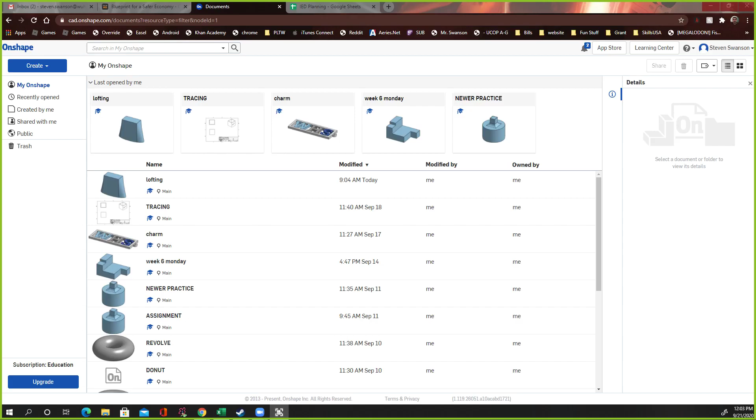So today we're going to do something called lofting. I'm going to create a new document and we'll call it lofting practice.

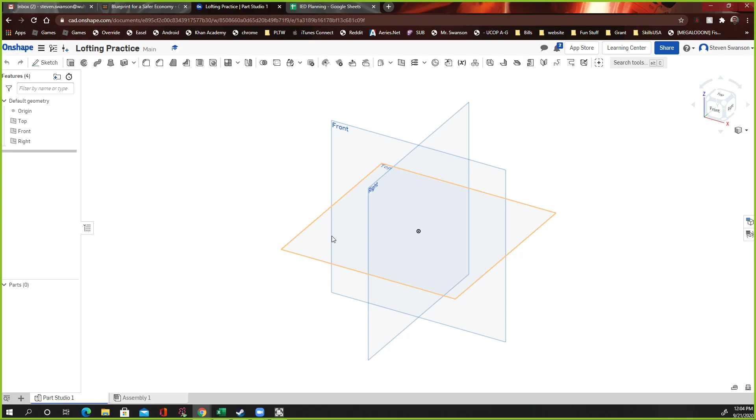So here we go. First off, we're going to do a sketch on this plane here. This is the top plane, so I'm going to click it. And then let's rotate that around. Normally on normal softwares it does that automatically, I don't know if there's a setting on this one.

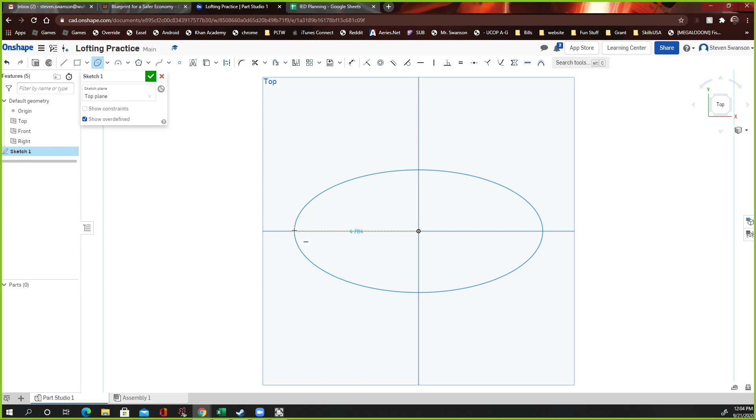Let's start with a shape. You can go with any shape you want. I'm going to go with an ellipse, just something a little bit complex. I'm going to click here, and then click this dimension tool and say this thing should be, let's say, 4 inches across.

And I'm going to click this wall and that wall and say it should be about... oops, I clicked the wrong thing. There we go, I'll say it should be 1.5 inches. So what I'm going to do is create this like an adapter for a vacuum nozzle.

So you have a vacuum and you want to create this wide nozzle like this, this thing's going to suck stuff up right here. Or this could be the top of a vase or whatever, it doesn't really matter.

Okay, so I'm done, so I'm going to check this. So we have our one shape and it turned black, which means it's kind of locked up. We pretty much decided every size possible in position.

So there it is. Now I need a new plane. Pay attention to this part. Here's where we need a new plane to draw on. It's got to be kind of, I guess, parallel to this one right here. So watch what we do.

There should be something called plane tool right here. So there it is, see plane? So click that, and then we're just going to do a simple offset plane. I'm going to click this plane, and you see how it raises a new one up right here?

How far away? Let's make this 5 inches tall. Okay, so we'll go 5 inches tall and go. There it is. So there's that new plane it did. See, it's called plane 1.

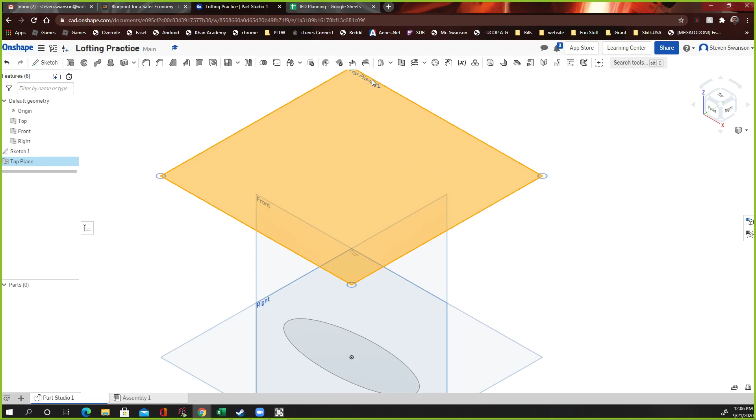And you could name it. You could right click on this and rename it and say top plane, so now it's called top plane. And I could even rename this one, I think... no, I cannot. So that's kind of dumb because I have top and top plane, but anyway, it's fine.

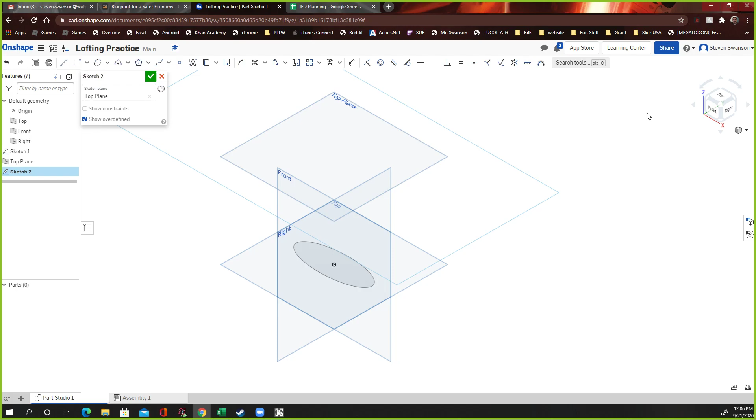You guys get the point. So let me escape out of here. Alright, so we're going to draw on this one right here now. Okay, so let's go to sketch and draw on that new one I just made. Let's click top plane so I can look at it.

And now I'm not drawing on this ellipse. Remember, this is like 4 inches above, or 5 inches above, whatever I said. So let's go with a more different shape, something completely different than this one.

Okay, so I'm just going to draw a rectangle and pretend this is the connector that connects to my vacuum. This could be a circle as well, so we could do a circle or a square. So I'm going to do a square right now.

Or rectangle, I should say. And let's dimension it up, it's always good practice. Let's go 2 inches here. And then let's go not the angle... come on now. Let's go 1 inch right there.

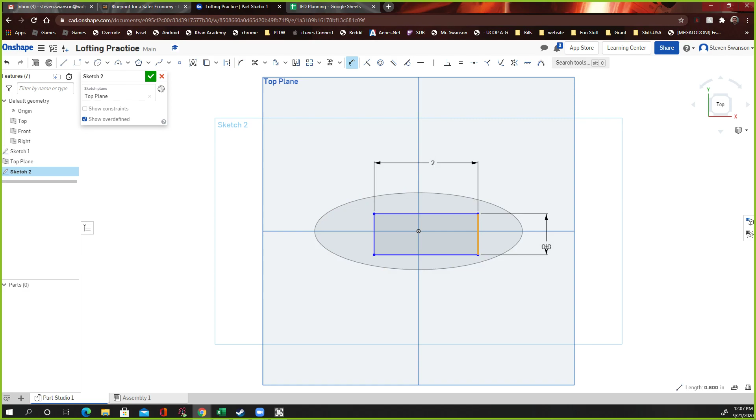And to make this centered, I'm going to say that distance right there should be 0.5 inches. And this right here, from the center to this line, should be 1 inch. That should be 1 inch to make it centered. This has to be 1 inch because remember, this whole thing is 2.

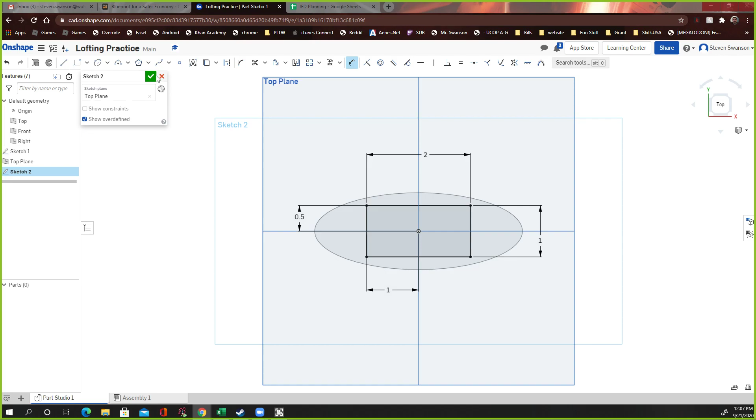So I just divide it in half and now it's locked up. Notice it turned black, so we're all good to go. So now I'm done, let's click that little check mark to say we're done. And let's go isometric view.

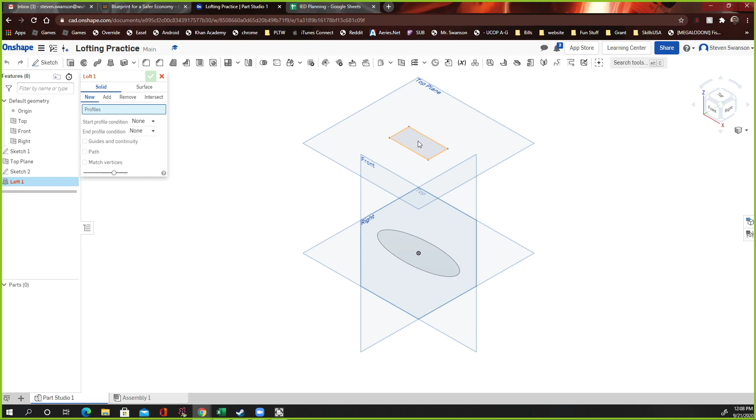Look at that. You see how I have a shape up here and a shape here? We're going to connect this one to this one and it's going to fill in the geometry itself. See this tool right here? Loft, you see it's called Loft right here. Let's click it, and it says profiles. So click this one and click that one. Whoa, look at that.

And it connected it. So let's say it was a special little attachment I wanted to make, it works. Now there's a couple things you could do.

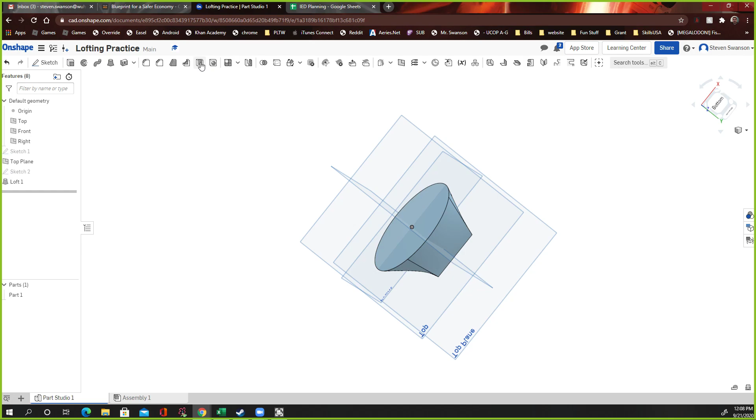We're going to teach you two more things here. We can do something called shell. Do you guys see shell right here? You click that, then we click the face, and then it removes everything, leaving only this amount of plastic left, or whatever material you're talking about. So I'll explain this in a minute. Right now, let's just keep it 0.1 inches, and push check mark.

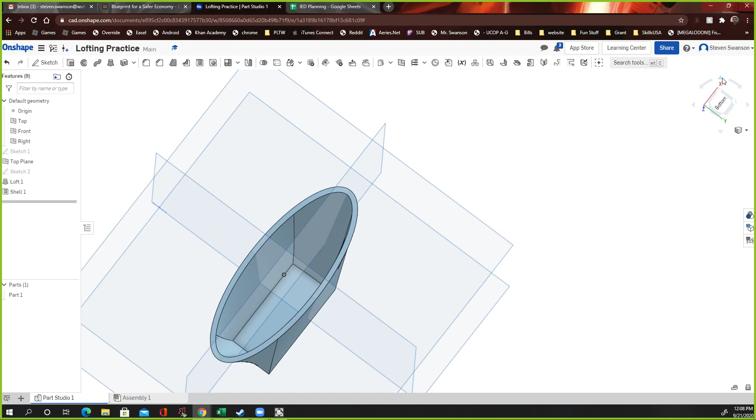So what did it do? You guys want to see? It made like a hole. What it does is, when I click this face, it literally eats away everything like a bunch of termites eating all the way down, leaving only whatever you put, 0.1 inches left, all the way down. So this would be like a vase, I guess. Like if you wanted to put this up, you can fill this with something, like flowers or something.

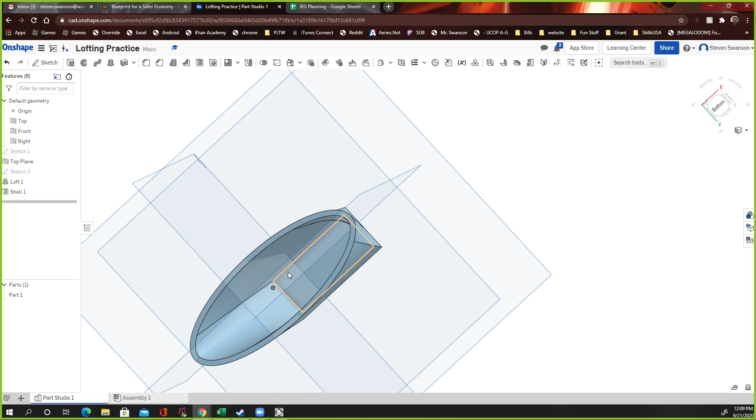But if I wanted a hole, here's how I do this. I have students that messed up before. Watch this. They're like, man, I shelled it, but it didn't do what I wanted. Well, you see right here, I shelled, I lofted, I drew a plane, and I did a sketch, and I did a new plane, I did original sketch, right? It records everything, so I can delete that shell off. I didn't mean to do that.

I let her in already, so she should be in there now. Next. But thank you for letting me know.

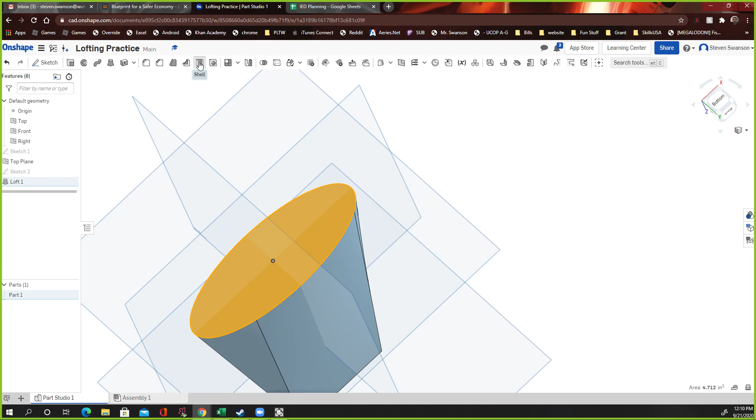Shell. There we go, shell. And let's click hollow and see what happens. Oh, that doesn't work. Oh, I know what hollow does, it makes all the inside hollow, so it doesn't remove the face I clicked on. So if I let go of that, then it does eat that face away as well.

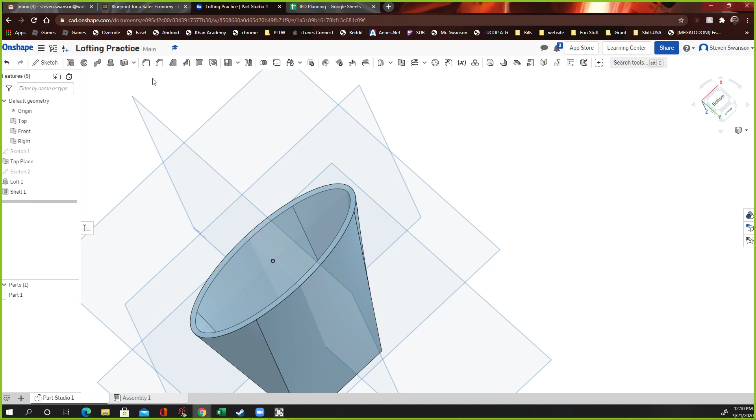Let's check that. I'm curious if I want to shell this side as well, if I want to make it go all the way through. Let's see. Shell. This is what I was trying to do. Yeah, I don't think it likes to do that. Yeah, it doesn't like to do that.

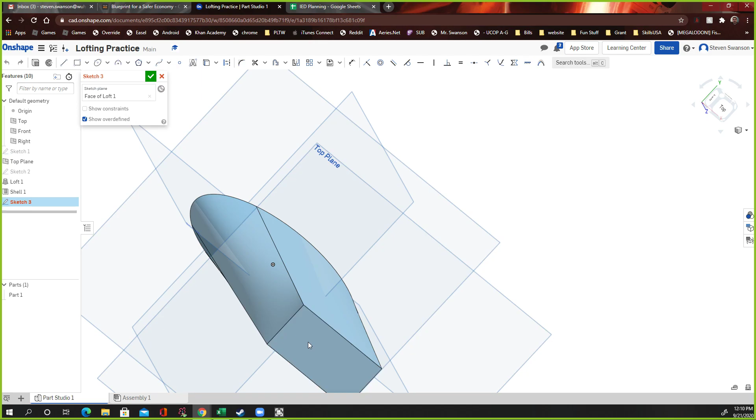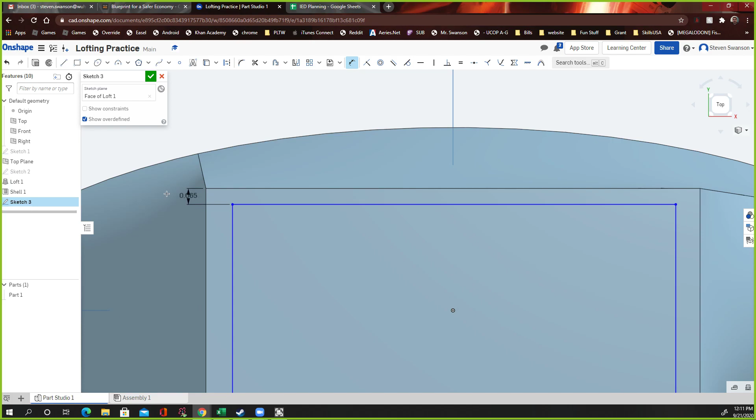So you'd have to draw a new hole if you really wanted it. For example, you would say sketch, and you would sketch this, and then you would draw a new square here. I'm sure there might be another way to do this, but if it really bugged you and you wanted the 0.1 hole here, you could just say from here to here should be 0.1, and then this should be much smaller. Remember, this was 2 inches before, so this should be 1.8 inches now, taking 0.1 off each side. Then this to here needs to be 0.1. There we go, it's all shifting over.

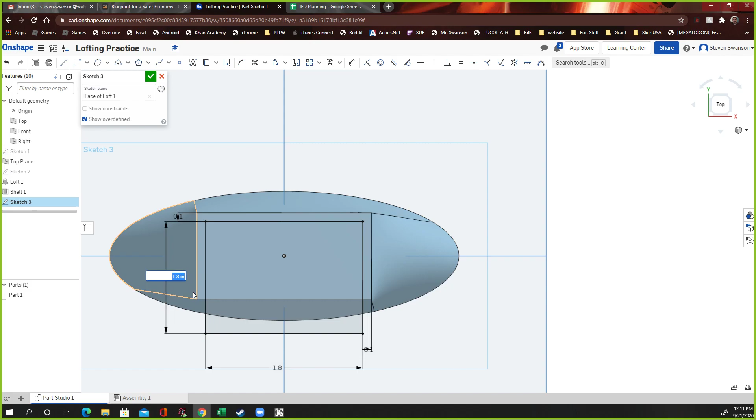And this whole thing originally was 1 inch, I think? No, 1.5. So I need to take 0.2 off, so this is 1.3, I think. Nope, that was wrong. Maybe it was 1 inch before. So then it should be 0.8. There we go. That's what I was looking for.

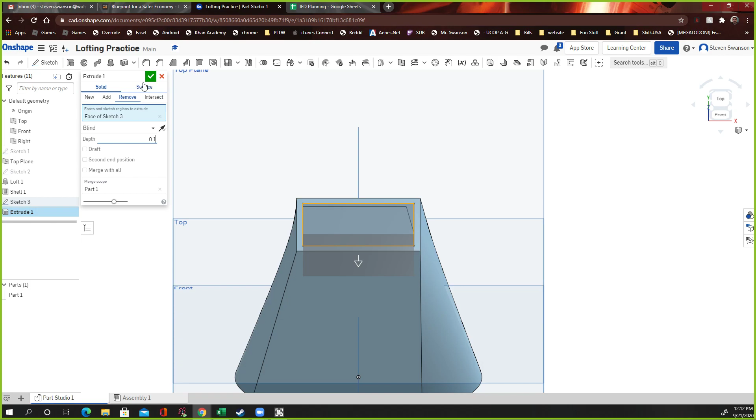So then I can say finish, and then here I could just do a simple extrude, and then just make sure I'm going the right direction here. Let's see. Nope, I want to go the other way, so I'm going to go to remove, and I only need to go down like 0.1 inches, because remember, that's how thick the shell was originally. So that should work. Let's see. Yeah, there we go. So now I have the hole all the way through, so if that's what you wanted to do.

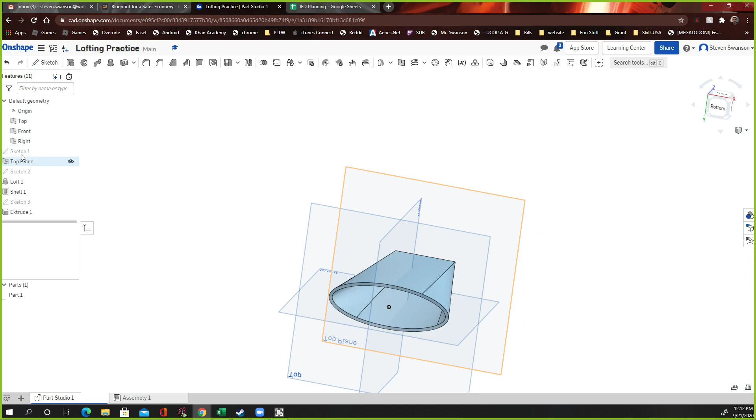So that's what lofting is. You could do a star shape to a circle. You could do really cool shapes, one shape to another shape, and then you loft them together. So if you remember, just as a quick review, you start with one shape. So you start with that shape. Notice I drew this right here.

I drew an oval. Then you have to take a new plane, so you have to click that plane tool right here, and then you add a new plane and you make it a certain distance away. So if you look where I did that, let me show you. So I originally drew this oval on this plane. Then I clicked plane tool, wherever that was, I did it right here, and then I created a new plane up here, 5 inches away. Then I did sketch 2 right here.

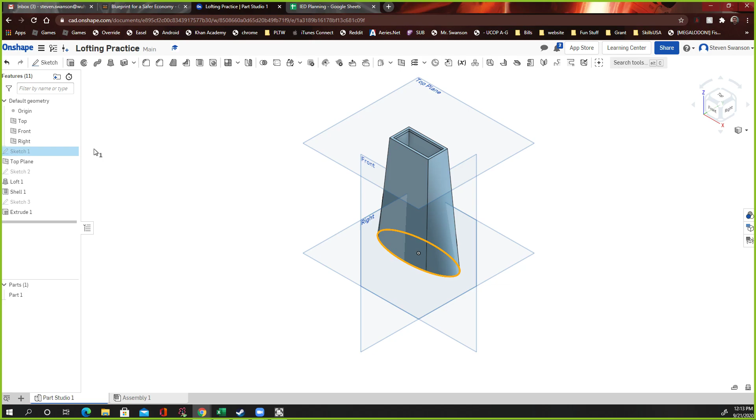See, when I hover over it, it colors it. So when I hover over that, that's the sketch 2. So I did the new plane right there. I sketched 2, I drew that. Then I did the loft connecting the two shapes together, and that's what you do. You take one shape that's closed and another shape that's closed, and it'll just connect the two together.

And then from there, I did a shell feature right here, which is right here, to shell it out and kind of eat away all the material inside if you want to make it hollow. And that's it, folks.